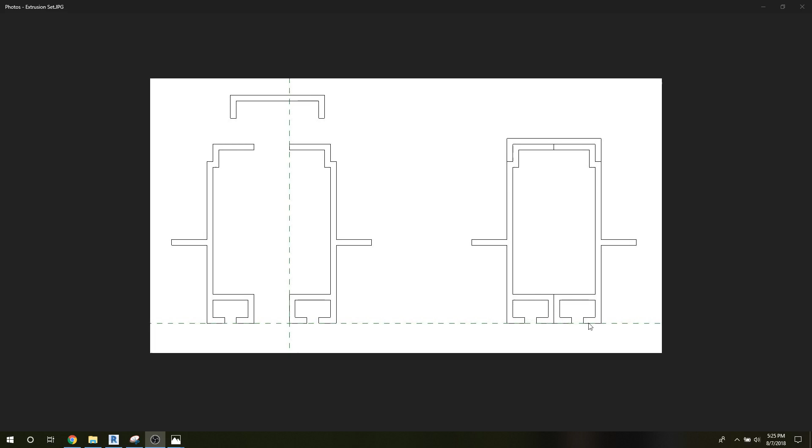On the bottom there's a slot that accepts a bolt and a nut behind it so that it can be attached and hung by a bracket. And we have another drawing here that'll be on Blackboard, which is the dimension view of that. So I can go into Revit now and we can start building this profile.

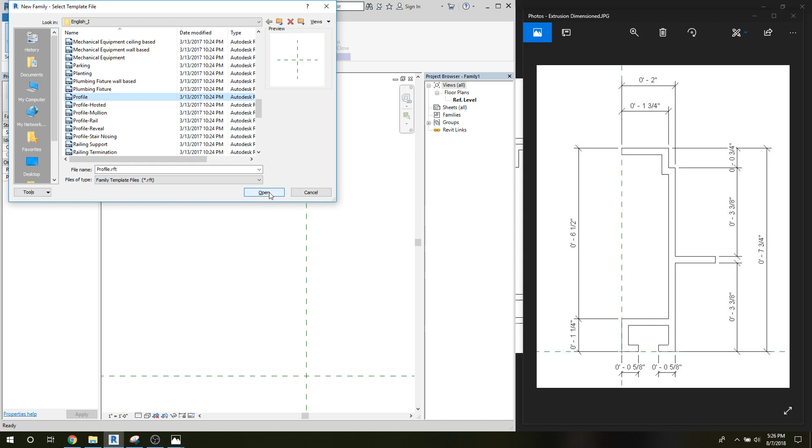So I'm going to go ahead and open up a new document, a new family. New family. Takes me into the right area right away. And then I'm going to open up a profile, not a hosted one. We're going to actually put these on sweeps once we insert it into our Revit curtain wall family. So I'll go ahead and open that, and we'll start out by drawing the profile. And we're not extruding this, so we're just drawing lines at this point.

And if we take a look at our drawing, we know it's 7 3/4 by 2 inches wide. So I'll just zoom in here, and it's really intended to be 8 inches deep minus 1/4 for the cap that's also 1/4 inch. And the whole basis for this is we're using a uniform wall thickness of 1/4 inch. So now we have that laid out, and I've set the offset tool for 1/4 inch so I can bounce a bunch of lines in here.

I'm going to need a line over this way. We're going to need to copy and move a line 3/4 inch down. So I'm going to go ahead and grab that and move that down 3/4 inch. And then we need that to be offset again. So I'm just quickly going through and laying out the reference lines for everything we need. This bottom line needs to come up 1 1/4 inch. So I'll grab it and move it up. Oops, I don't think I had it selected. And that wants to come up 1 1/4 inch.

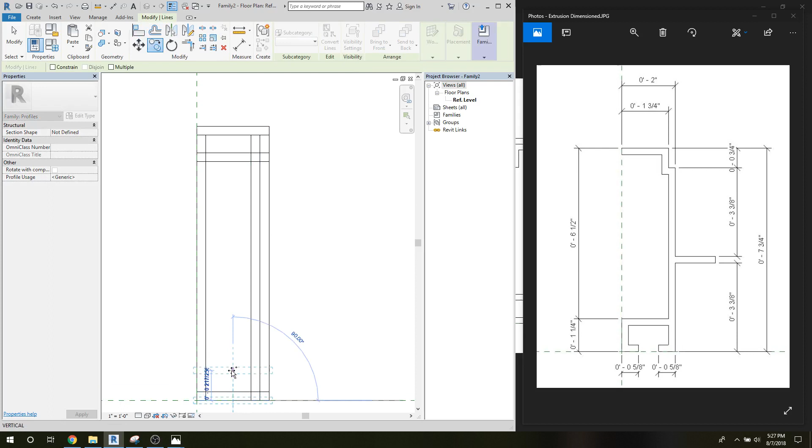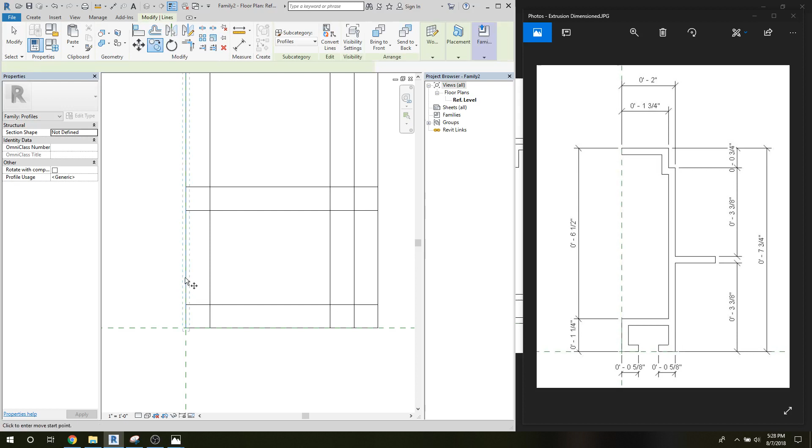I think I'll just break down and type that in. And we'll offset back a little edge on that. And then we have these 5/8 inch opening here. So we'll go ahead and move this line over. I'll select this line, copy it over, 5/8 inch. And we'll shorten this one up just so it isn't confusing. So now we have the start of our channel down there. This line never extends down that far, so we'll pull that one back up again. That's the inside of our...

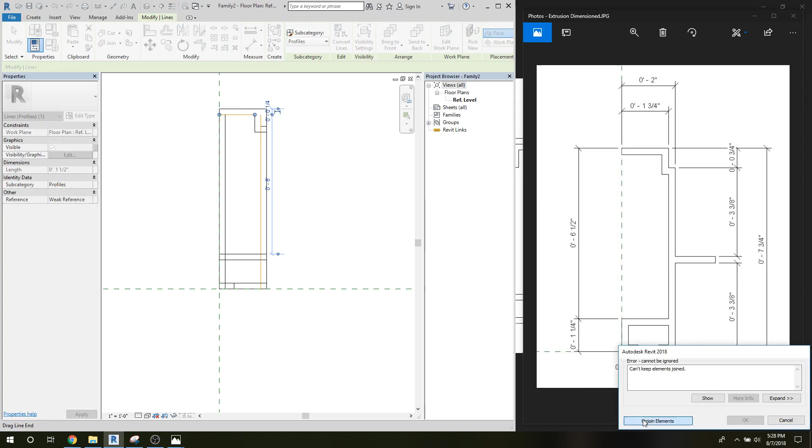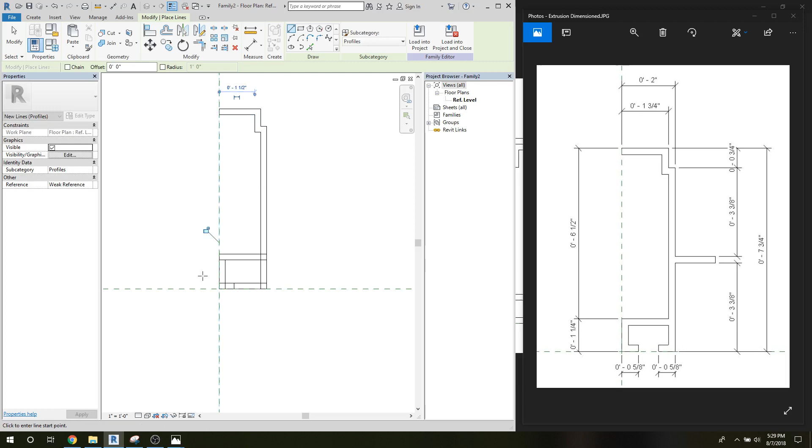So we're getting a bunch of warnings for unjoined elements, but that's obvious because those are all drawn as one piece. Now we need another line here. And obviously this is probably tedious for anyone watching through, so go ahead and draw it on your own. Or if you'd like to just stick with it here, you're welcome to. Gives you a chance to practice your drafting.

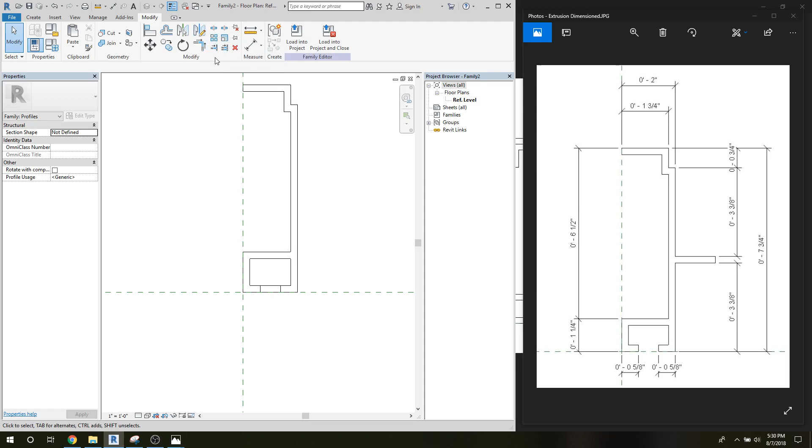This line here, we can go ahead and mirror. We can find the center of a line here, and we're not getting an indication. I don't know why that is. Maybe I haven't picked this line yet clearly. There we go. All right, and oops, gonna need to put a line back in I just deleted. I need the split tool. I don't use that very well. I seem to be kind of lame with that. So I'll just...

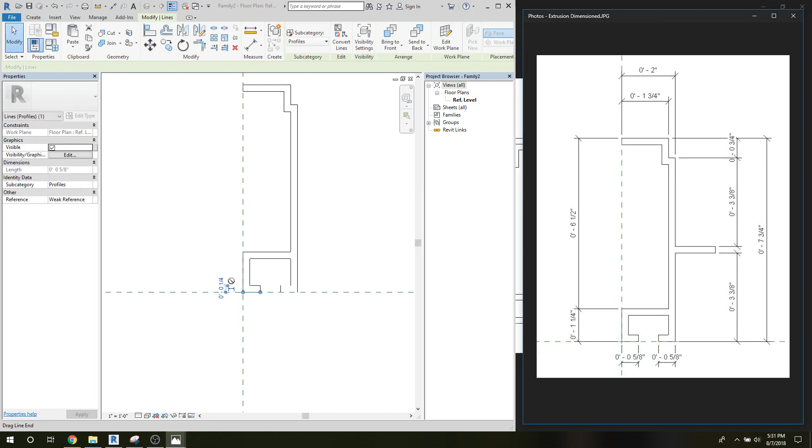Okay, the last thing we need to do is insert this tab that comes out, and it looks like I've left a dimension off, and I believe this is actually about 1 3/4 inches. It really isn't critical. It's the bite for where the glass is going to go. So let's just start sketching it out here. I'm going to create a line, and let's say it's 1 3/4. I'm going to go ahead and move that up to 3 3/8.

Oops, I got the align tool. Excuse me, I'm futzing around here. There we go. All right, we want to come up 3, and 0.375 is 3/8 of an inch. Once again, not critical, and it looks like we've had a little bit of parametric help here that we didn't want. I'm going to pull this back down again and see what happened. Yeah, I've fuddled up this line. I'm going to just pull it back so it's not linked to that other one parametrically, and then we'll move it up. And I must have done it about 3 feet. Try that one more time.

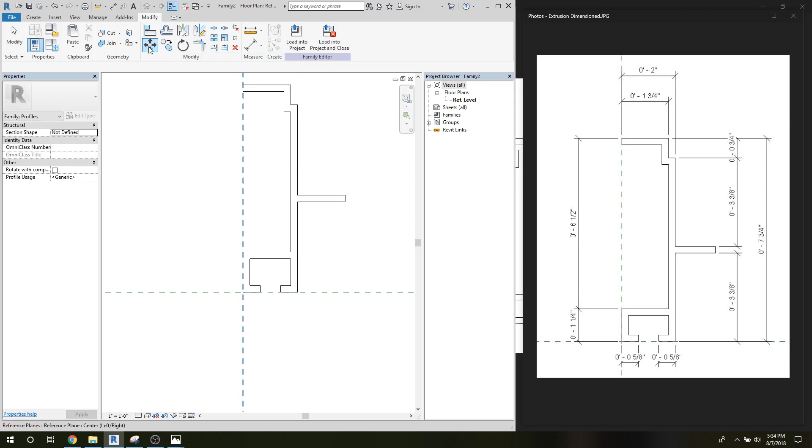Okay, so we have our whole unit constructed. This still looks like it's a little larger than the other one, so I'm going to guess that's 1 3/4. So let's just take and move that in. So I'm going to just select that and move that in 1/4 inch. Okay, there's our profile constructed. Now we're ready to load that into our project, our curtain wall, and we'll pick that up on the next clip.